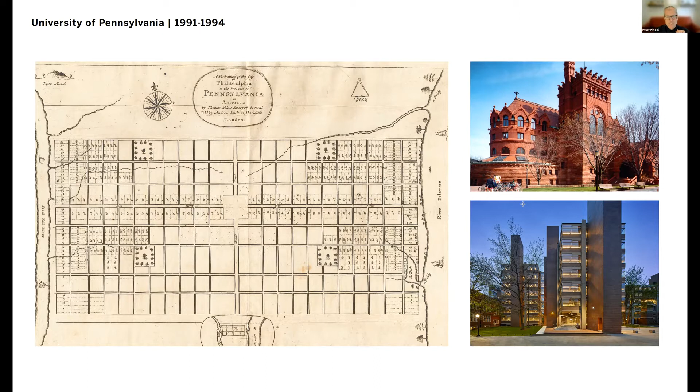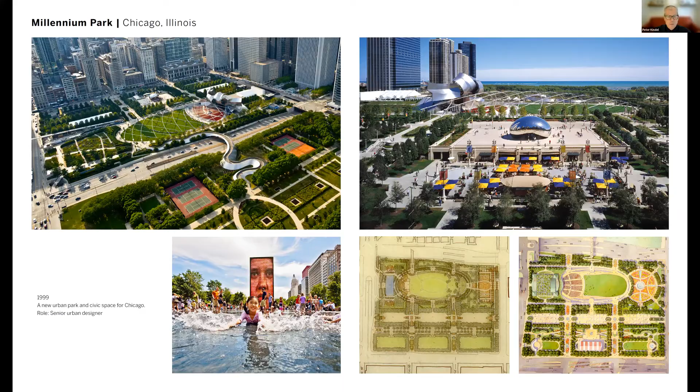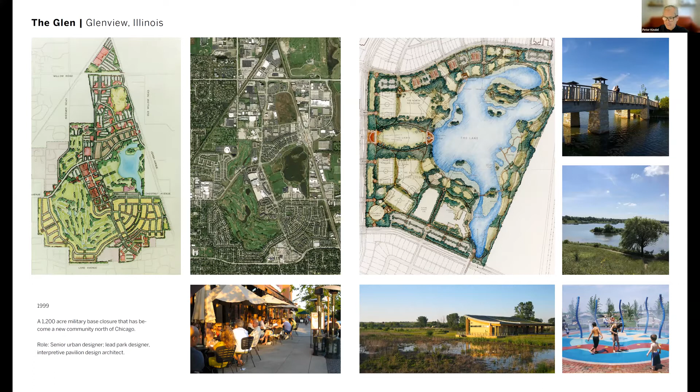I thought I would focus for the first half of the discussion on my work in Hong Kong. This was a very transformative time for me. My wife and I moved to Hong Kong in 2014. We were there for 4 years, and we essentially built the Hong Kong studio for SOM from scratch. When I got there, there was just one other person, and by the time I left, there were 16 people that made up the studio. It was a very successful run.

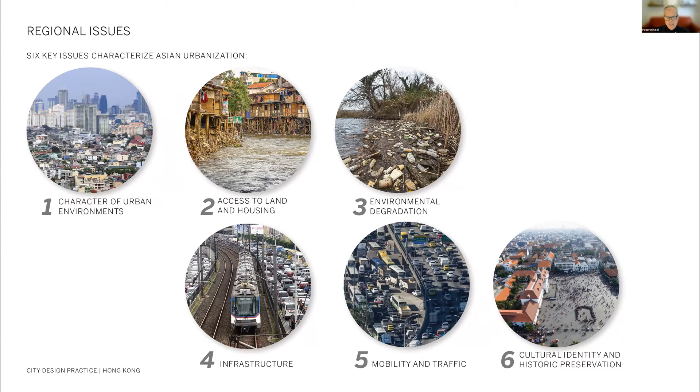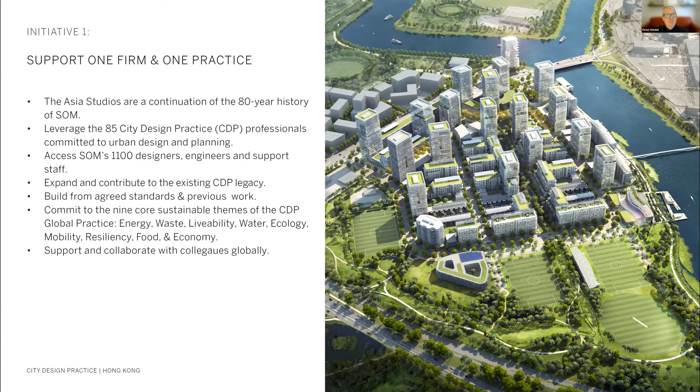So I thought I'd just show you a few projects. We organized our studio around a few different initiatives. One was really to extend the practice and support SOM. A second one is, again, to commit to cities to keep that mission alive in our work in Asia.

One of the big components I advocated for was environmental restoration. Environmental degradation in Asia is a big issue, so we tried to make all of our projects support the idea of restoration.

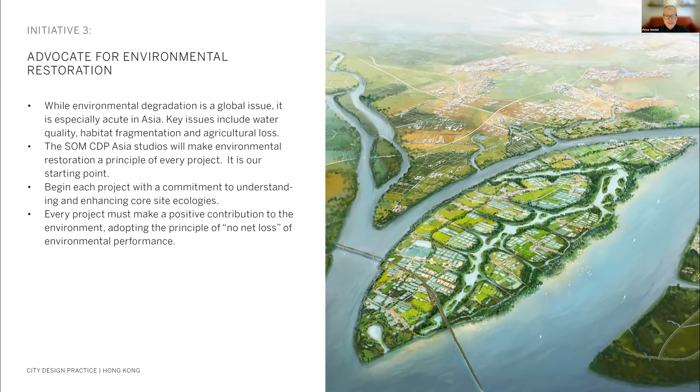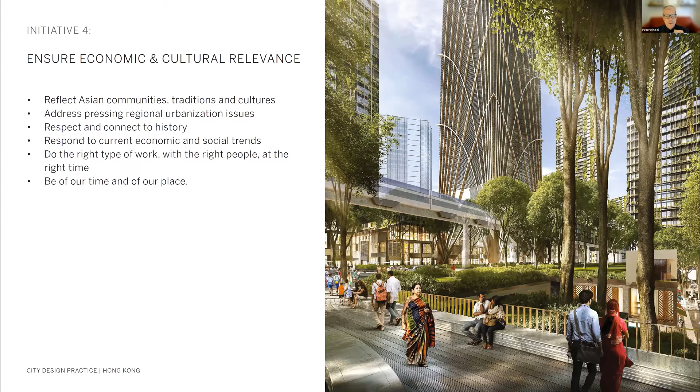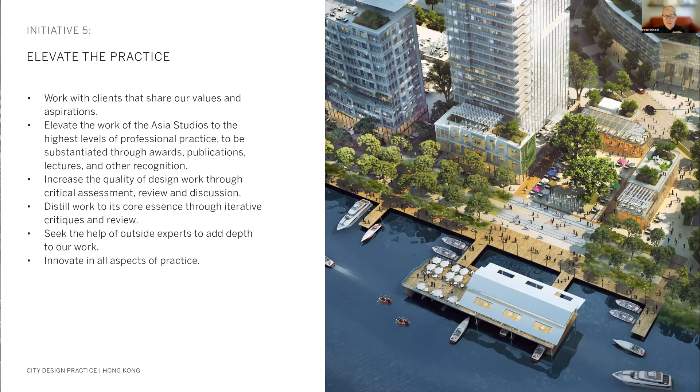And then the economic and cultural relevance of our work is very important. Asia has many different countries, many different cultures. I think in the Association of Southeast Asian Nations there are 10 individual countries, each with their own culture and traditions, so we really tried to understand that. And then, of course, elevate the level of work in Southeast Asia and Asia in general, bringing a level of excellence and craft to urbanism.

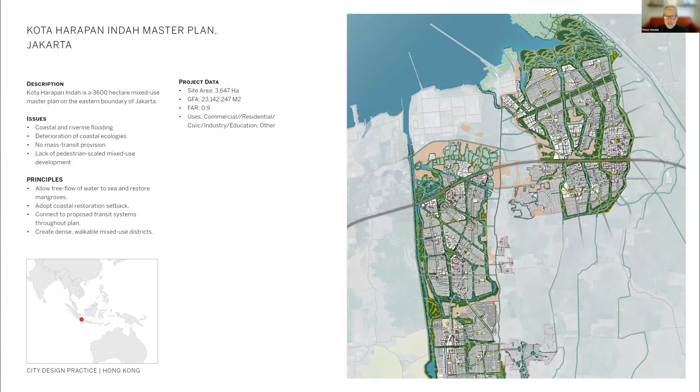One of the cities we worked a lot in was Jakarta. The very first project we worked on was on the eastern side of Jakarta for a client we had been pursuing for quite a while. They had very significant land holdings, which you can see on the right. However, it was right on the sea edge, and so what we did was work with the existing hydrological systems to structure the plan around these drainage corridors, which you can see in this image.

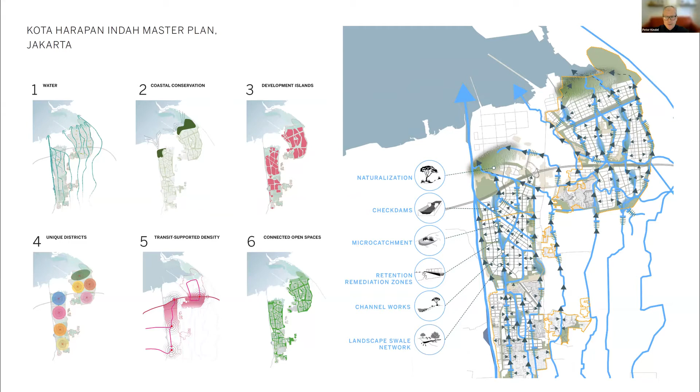We worked oftentimes with consulting landscape architects. In this case, it was a firm out of Toronto, but you can see the water system on this site was very complex on the right-hand side. So the project really became about accommodating sea level rise and these floodwaters, but also trying to create good urbanism, good roads, good public space, which you can see here.

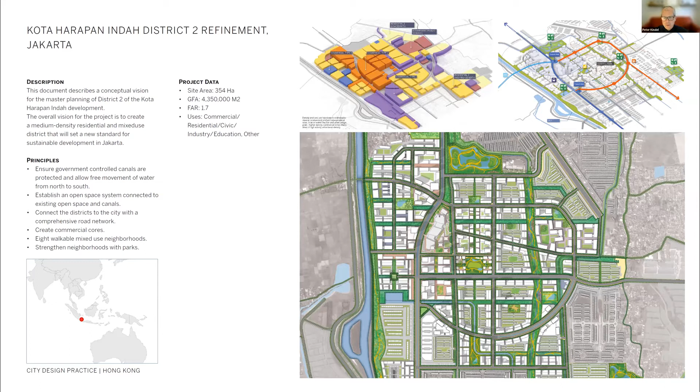And then we had the opportunity to work on a detailed plan. This is the phase 1 portion of the project, so we were able to take some of these ideas further in this part of the project. You can see some of the drawings across the bottom. We were relying heavily on landscape concepts to manage the open space and stormwater concepts.

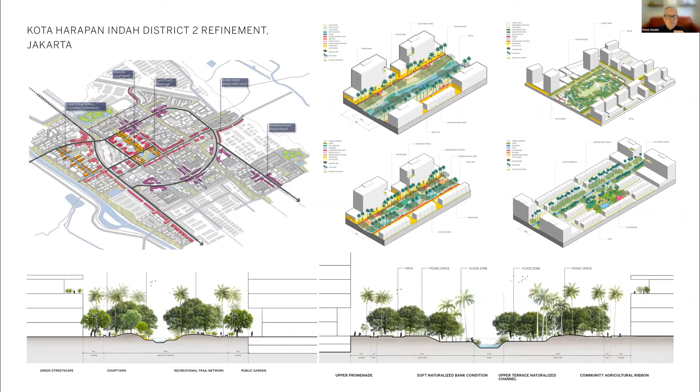I think what's exciting about urban design, at least for me, is the integration of architecture with public space and landscape. That's really the area I am most interested in. How do these systems work together to build communities?

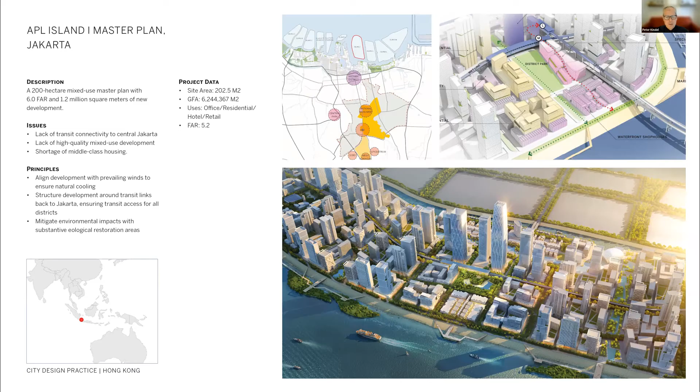Another project in Jakarta was this one off the coast. One of the issues in these countries is because the land ownership structure is less clear than, say, in the United States or Western nations, oftentimes the strategy is to build in the water, in these shallow areas off the coast. So development rights are awarded to developers and they dredge and build islands. This was one of those projects.

So we worked with this owner to create a development concept for this island, again promoting concepts of good urbanism. You can see here the building forms, both low rise and high rise. We connected this into the Jakarta subway system, so you could actually take the subway back into the main part of the city. One of the things we always try to do is have a mass transportation or public transit component to our work.

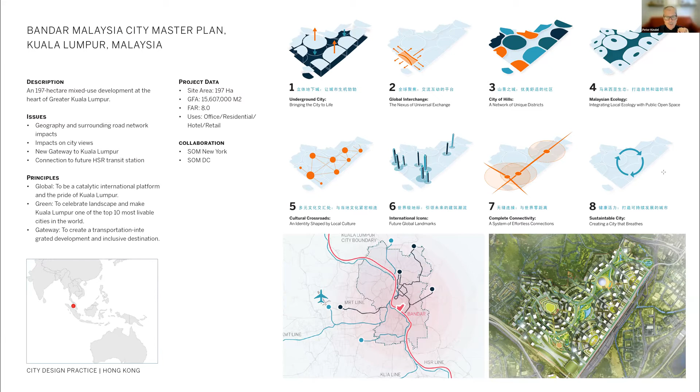This project was in Kuala Lumpur, Malaysia. This was also a really interesting project. It was an old airfield that was being decommissioned and redeveloped. You can see our diagrams in the upper right. We often try and clarify the design principles through these diagrams. This is the overall development plan.

What was interesting about the site is they carved the airfield out of the hills, so part of the site was hilly and part was flat. The concept was to use the density the developer was asking for to rebuild the hills that used to be there. We designed this central open space as the primary park. This one also had a regional rail link and subway connections that connected down to Singapore, and it was also a high-speed rail station.

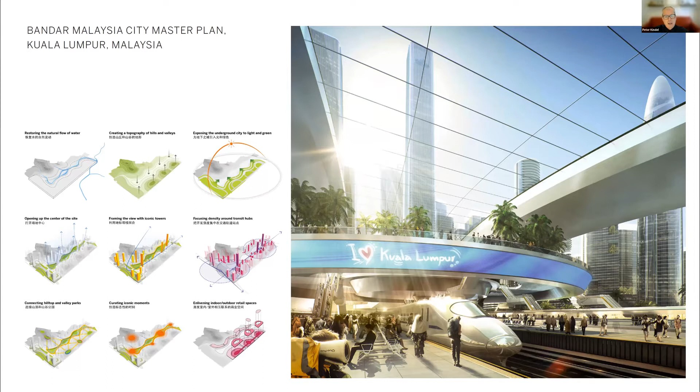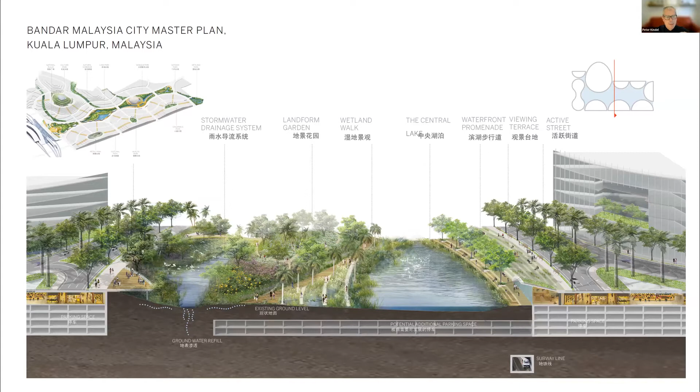Here you see a view of that central park. Again, a very dense project, but you can see how those building forms begin to recreate the hills, and the central park actually functioned as the valley for the project, so it accepted the stormwater. In this image, you can see how we tried to design the structured parking below grade, and in the upper left, how the Central Park organized the project as a primary public space.

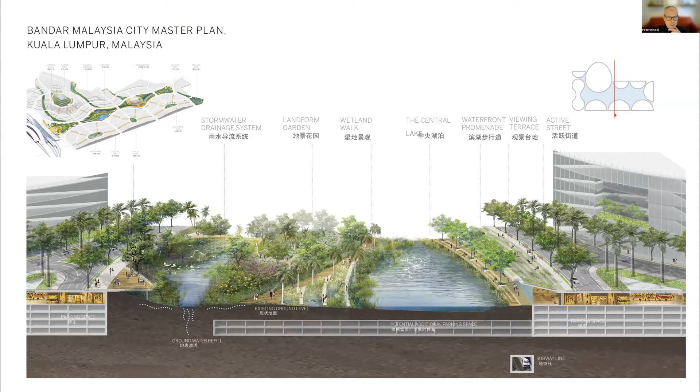This was a competition that we won, so the project is moving forward. But like so many places and projects in Asia, a lot of times it'll change substantially from the original competition submission. Here's a view of that Central Park area.

Another project that we worked on, also a reclamation project, is this one in Manila. Like many of these cities, Manila has a lot of population growth, again demand for development land. This was a shallow area off the coast of Manila, just south of the city.

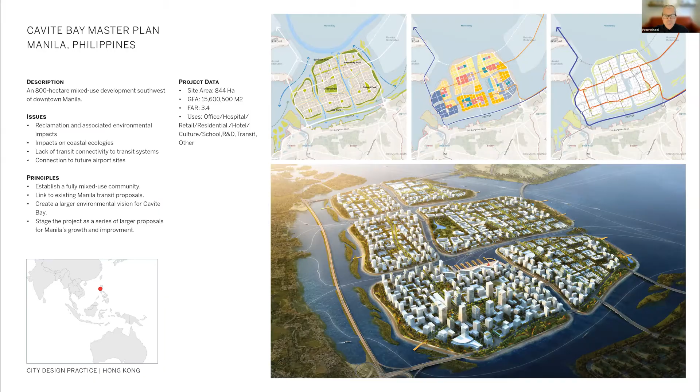As a practice, we have really tried to not do much reclamation anymore. Reclamation creates tremendous impacts on the seabed. So we have begun to move away from reclamation projects, but at this time we were still doing them.

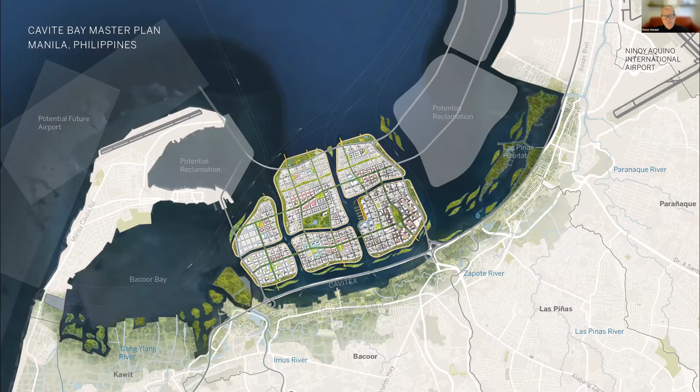But what we tried to do was create some offsetting benefits. You can see to the left and right of this, we proposed restoration of ecological areas that have been lost. So it was a way of balancing the impacts of reclamation with restoration of these ecological habitats. We always tried to take a bigger view of how the project began to connect back to the city, and in that light, we leveraged this project to create these 10 projects for Manila. The diagrams on the right illustrate how reclamation could be done in a more sensitive manner, but still respecting the riverways and estuaries so important to the city.

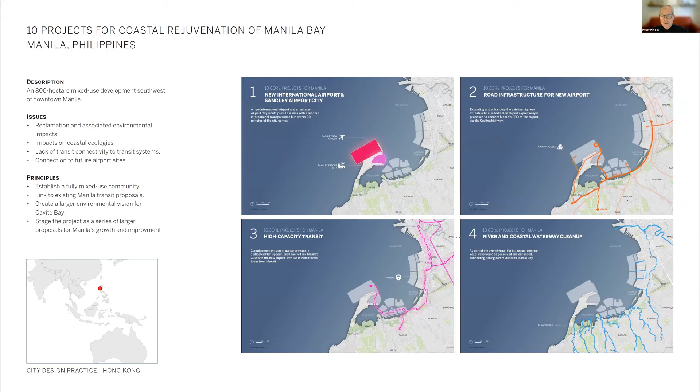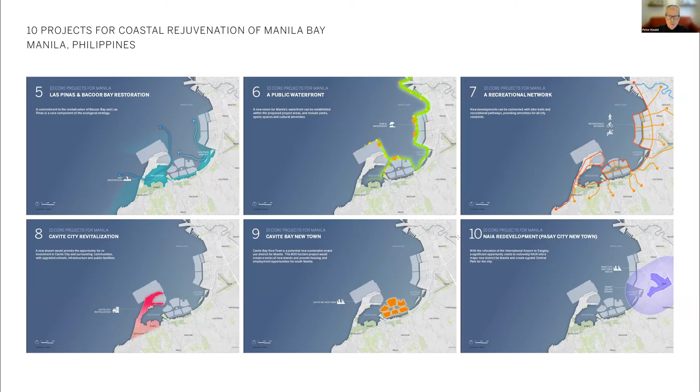And again, we always look at things holistically, not only from a development standpoint, but from an ecological standpoint and a transportation standpoint. So these were always good ways to understand the impacts of the projects overall.

Another important project that I worked on was this one, Cook Cove, in Sydney, Australia. This was the first time I had been to Australia and worked in Australia. This was an existing golf course right next to the airport that was being considered for redevelopment. What was interesting, it was at the mouth of this river, and this site also would flood occasionally.

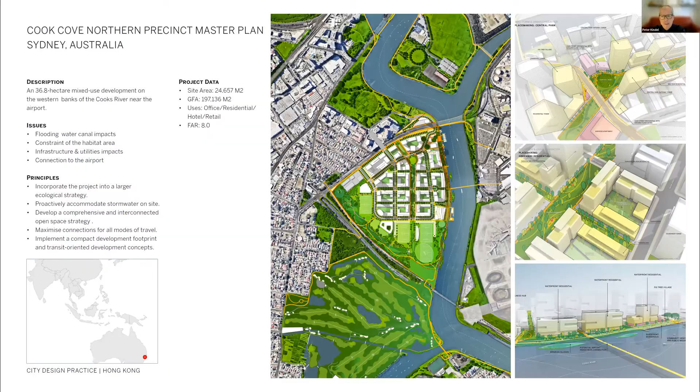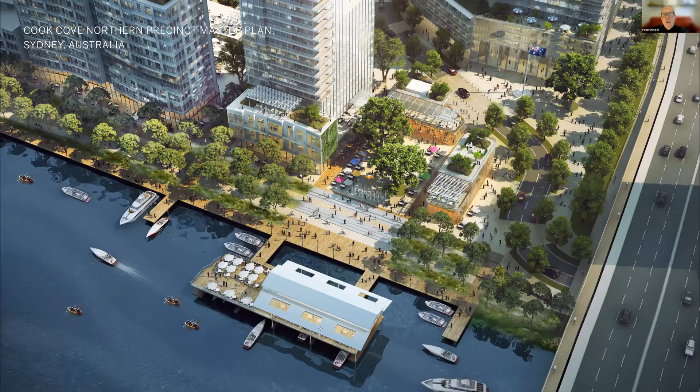The project was designed to accommodate flooding. You can see this green channel down the middle of the project—that's actually a floodway. So when this river starts to rise, we designed it in a manner that water could cross over this road and go through the project. The whole southern part of the project, where these recreation fields are, was designed to flood, to accommodate this stormwater. That's something we spend a lot of time on, thinking about how changes in sea level or flood control issues can be handled on these sensitive sites.

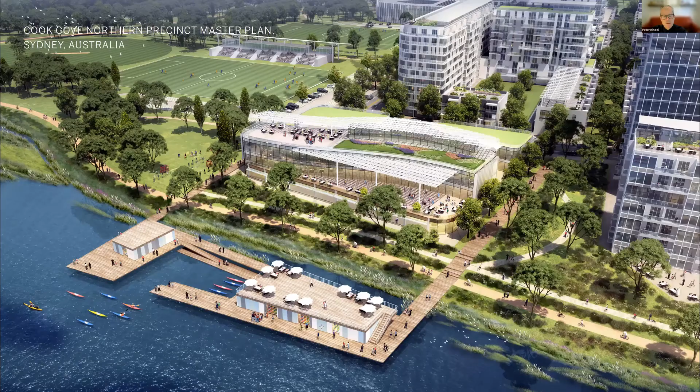We spent a lot of time on the water edge and some of the urban spaces to really create an active community. This was a mixed use community, with office and residential. We always try and advocate for a mix of uses because it reduces car travel, and then we fold in the ecology component.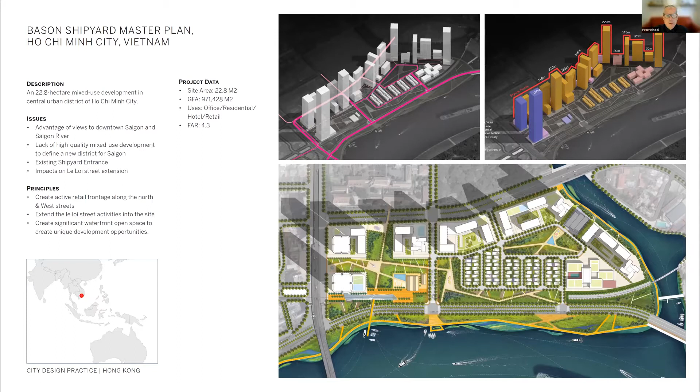We also worked in Vietnam. Here's a few projects—I'll go a little bit quickly through these. This is Ho Chi Minh City, formerly Saigon. Like all of these cities undergoing continued growth, this was actually a shipyard being considered for redevelopment. We see a lot of that in Asia, just like in the United States, these industrial sites being turned over to development. Another one, just up the river from that one, is this Thu Duc site.

This was a really fun project as well, again right on the river, an old industrial site. What was really great about it is it had an MRT station, or subway station, right in the center of the project. So we based the whole project around that transportation link and the river character. You can see the blue line through the middle of the plan was a canal that we introduced into the project to emphasize that riverfront and water connection.

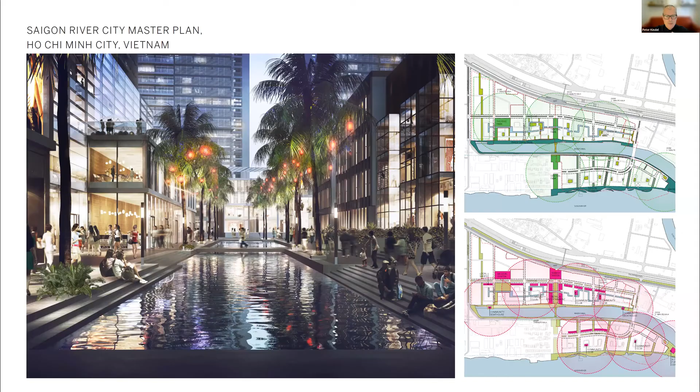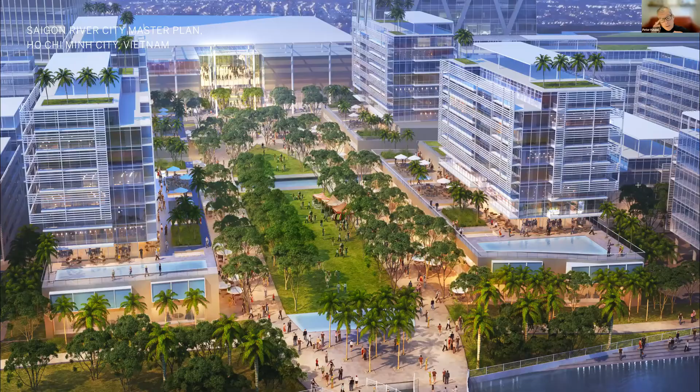We always try to give projects an identity that's drawn from the place and context. This was again a mixed-use project with both low-rise and high-rise buildings - lower rise towards the river edge and higher rise towards the highway and MRT subway line. We spend a lot of time on massing configuration as urban designers, and then often hand off to our architecture colleagues at SOM to advance them. Sometimes in highly collaborative environments, we work directly with the architects on specific buildings in our master plan so we can tailor the architecture to meet the master plan goals.

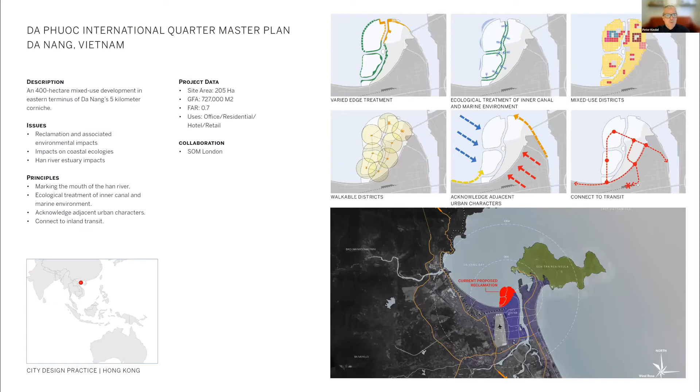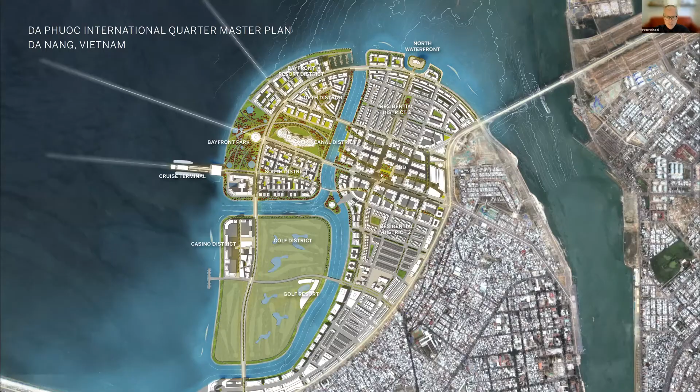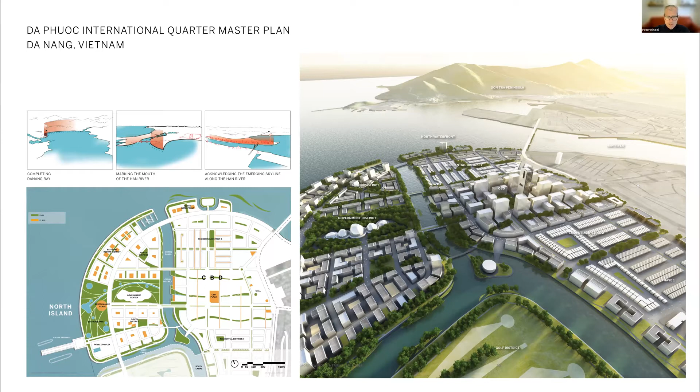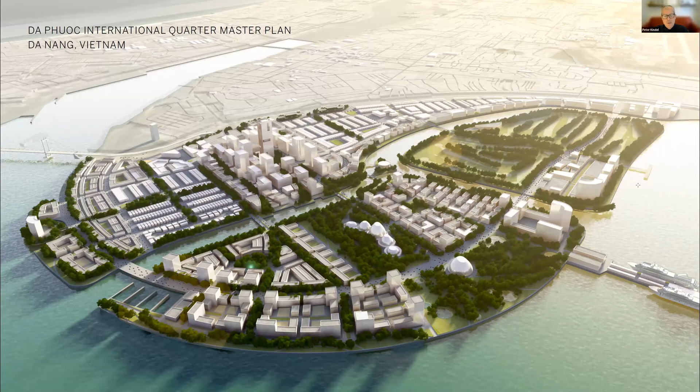We also worked in Da Nang. This was an extension of the downtown core. This project had actually been reclaimed, but they had not yet developed the land. So we were working with previously reclaimed land, but crafting a new plan for it. One of the things we always try to do is integrate new development with the existing cities we're working in - connecting to existing roadways, linking to existing open space connections, and creating a plan that's respectful of its location, making it feel like an extension of the city, not a separate project.

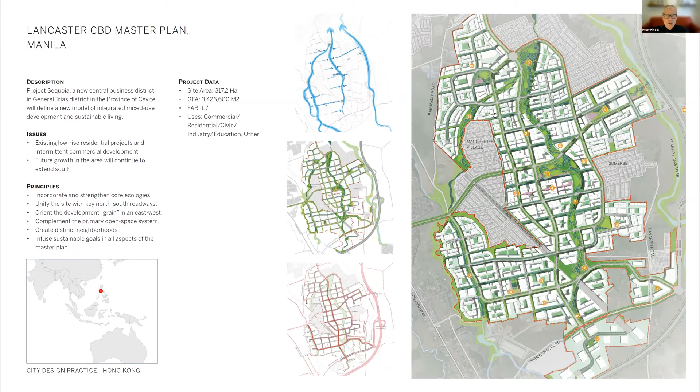Another issue in Asia is the intermittent development patterns you see. In the drawing on the right, the gray areas were neighborhoods that had already been developed, so the client asked us to propose a development strategy for the remaining land between these developments. The site boundary was extremely convoluted, but there was a river running through the middle of the area. So we structured the plan around that river - here you can see a view of the project and how we began to do that. This river ran from the upper left to the lower right, and that became the central organizing element for the whole project.

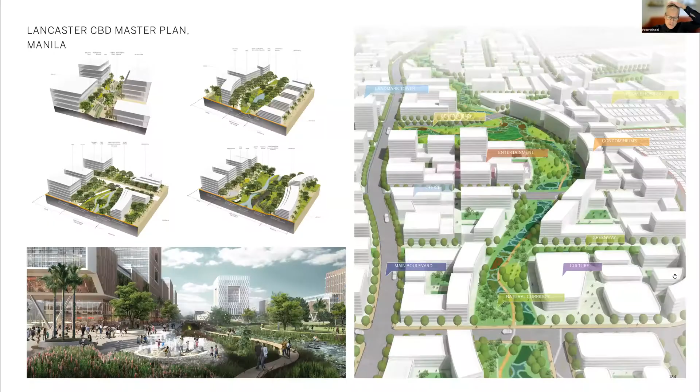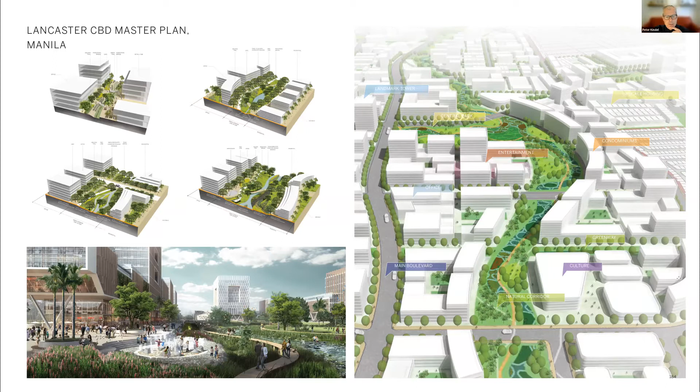I often draw on my landscape background to read these site indicators about how the land wants to be developed or could be developed, and then try to leverage those as assets rather than constraints. So you'll probably see in many of these projects this common thread of landscape architecture running through the urban design work.

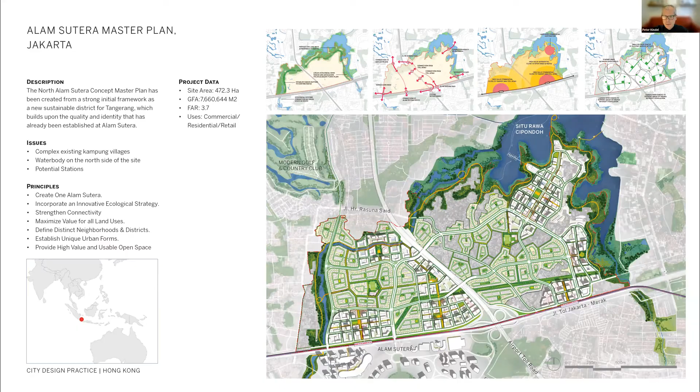Back in Jakarta, we had a similar issue with existing villages on the site. You can see in the lower right drawing there was tremendous complexity in the development boundary. These villages - oftentimes people have been living here for many years and don't want to move, or are reluctant to. So we tried to weave this new development in with those existing villages in a way that in 20 or 30 years it would just be part of a larger urban idea. There were some areas where we were able to develop more densely, shown in the taller buildings, but most of the project was actually low density.

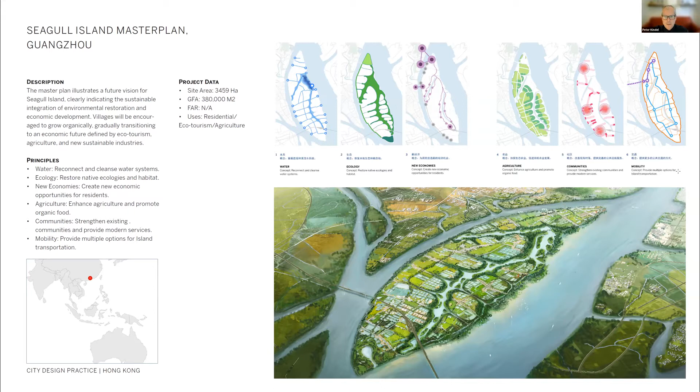The last project I wanted to share from my Hong Kong days is this Seagull Island master plan in China. This was a really unique project - it's in the Pearl River Delta, one of the major delta systems in China, one of the big three or four deltas just north of Hong Kong. What was really fascinating about this project is it was an island in the middle of the Pearl River, what they call the Lion River in China. The planning authorities from the city of Guangzhou wanted to redevelop the island as a destination for citizens of the city. It had extensive farming, and they wanted to make it into more of a tourist-based destination.

So we advocated really for three things. One is to preserve the existing villages and agriculture as a key part of the concept. The second is to restore the wetlands that used to exist between these islands, which you can kind of see on the drawing on the left. And third was to introduce this tourism component.

Because it's in a high risk flood area, there is a levee around the entire island. So we worked extensively with my team, on which there were a few landscape architects in addition to me, to soften these levees, which you see in the lower drawings, to reinstitute and reincorporate mangroves, which protect against flooding, while still leaving the levee to protect the land, but softening it.

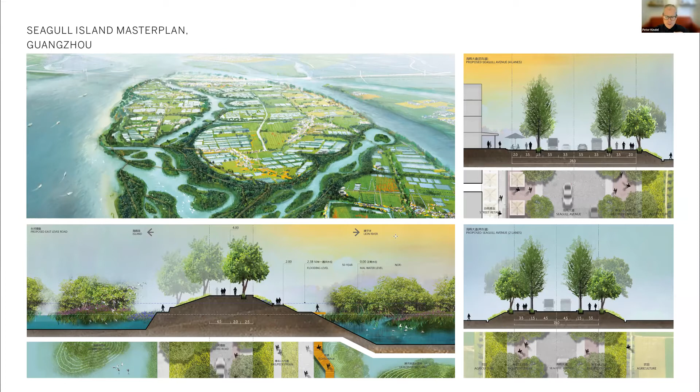And then we did these fun renderings. We were trying to look at new ways to express these ideas. So we came up with this new way of doing our renderings, which was a little more fun and a little more accessible for non-designers.

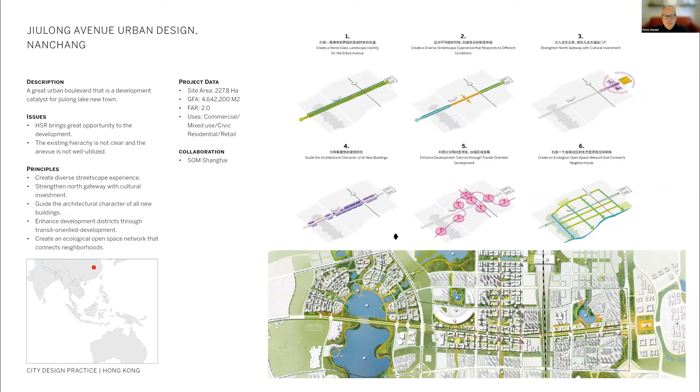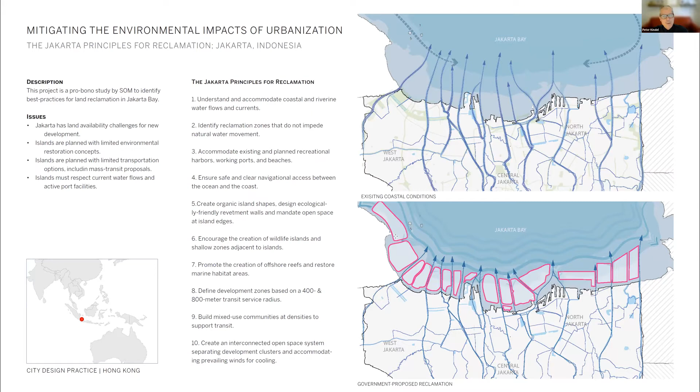I'll skip this project. We oftentimes do research along with the work that we're doing. As I mentioned in the Manila case, we did a larger strategy for Manila. We did the same thing actually for Jakarta, which we ended up calling the Jakarta Principles, because the projects we were working on were not unique. Different developers were doing similar projects all across Jakarta. So we said, why don't we just take a couple of weeks and write down the best practice principles that we thought were important.

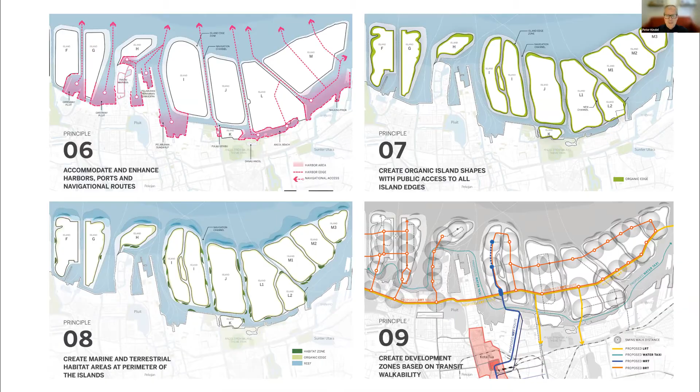Another great project that we took on as a research project was what we called the Hong Kong Waterline. Oftentimes I'd have the studio do these projects during the Christmas holidays, because a lot of times our work would get a little quieter. So we would just take the two weeks around Christmas and New Year's to do a two-week research piece.

This idea was generated by the fact that Hong Kong's coastline is actually not that accessible. There's a lot of trails in the middle of Hong Kong Island, but the coastline is tough to get to in many places. So we said, what if there was a water trail all the way around the perimeter of Hong Kong? In a lot of places this trail exists, but it's not continuous—it doesn't go all the way around the island. So that was really the concept, to connect up some of the pieces.

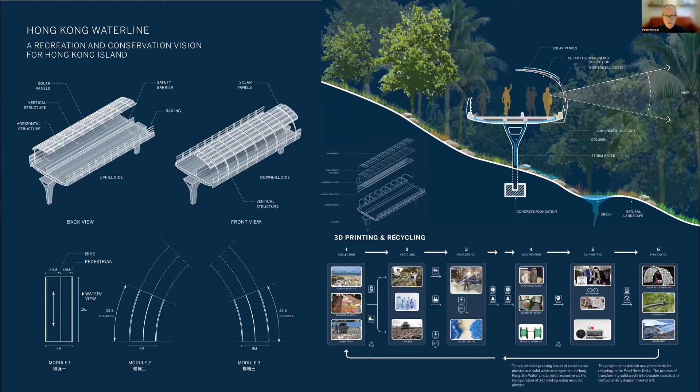You could insert these into the more natural landscape, so they wouldn't impact the natural lands. They would be above it, and it would also just be simpler to move through the landscape. But you're not fully removed from the landscape, you're just outside of it. So this is a rendering of what that might look like—again, you're a little bit up in the trees, and there would be a bikeway and a pedestrian trail. So that was a really fun project.

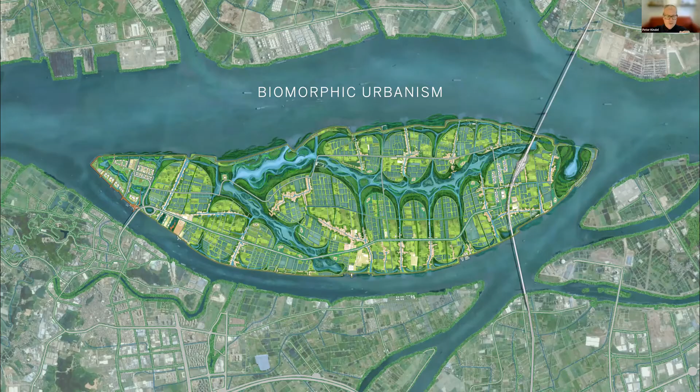So it started with this idea of biophilia, which many of you may know, based on the concept that everyone has an inherent attraction to the natural world.

I think most of you have heard of this idea of biophilic design, which is introducing nature into design, whether it's interior plants or buildings that have plants on them, but bringing nature into closer contact with people. There's also another idea out there called biomimicry, which states that our buildings should mimic nature. In other words, can nature teach us how to build better buildings or better places?

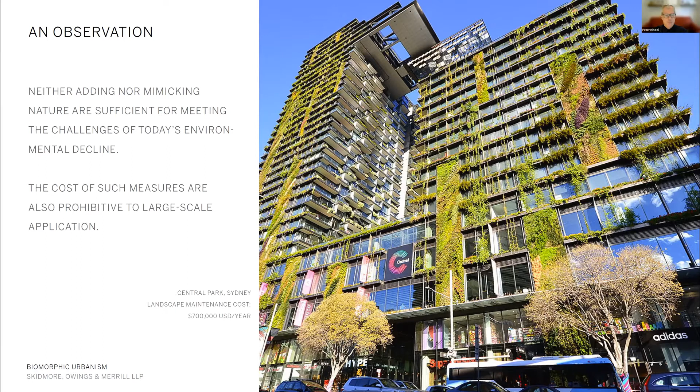The problem is that this often results in projects like this, where we're putting plants on buildings and it's very expensive. My concern is that it doesn't really have a beneficial impact on the ecosystems in which these buildings exist. It does serve a purpose, but it doesn't have that beneficial quality.

So I began to think more about how we could integrate ecology into our urbanism, and the fact that every city has a unique DNA, defined by its ecology and its culture. Every city is different. So I developed this idea of biomorphic urbanism, which states that ecological systems should be a foundational input into how we think about cities.

So this is hydrology, habitat, topography, climate, but we also need to incorporate cultural identity and social systems into our work. These two concepts are really fundamental to how biomorphic urbanism is initiated, the foundation of that concept.

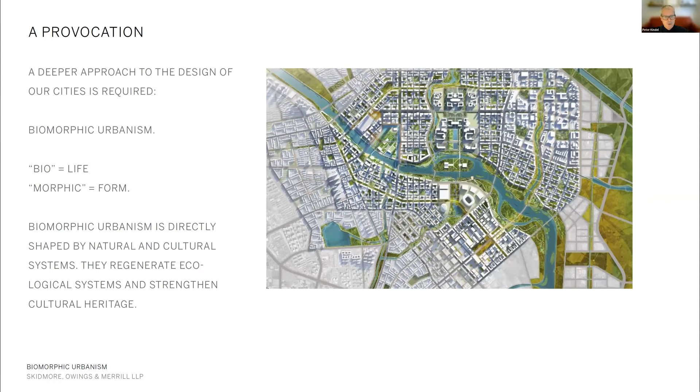So the idea really states that taking these two inputs, we can begin to develop a unique response to every urban design problem we address, incorporating social inputs and ecological inputs.

So how are they different? Biomimicry is more the emulation or mimicry of nature. Biophilic design is about introducing nature into projects, or adding it. Biomorphic urbanism is really having our cities shaped by ecology and culture.

So it's restorative in its purpose. A few corollaries to the idea: one is that these two are distinct and should be considered and discussed for their independent attributes. Each of them has a different purpose and value, a distinct purpose but also a distinct value, and those should be honored and understood.

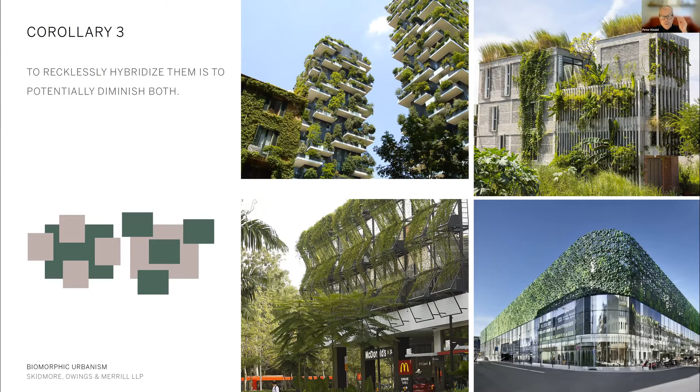But to hybridize them begins to diminish the impact of both of them, potentially. Not always, but sometimes. So what we want to avoid is this idea of greenwashing, where we simply add nature randomly into our environments without that restorative benefit of the ecosystem.

Corollary 4 is that our engineered systems have become too dominant in how we plan cities. This is a picture of the LA River, which has been channelized and basically stripped of its ecological character.

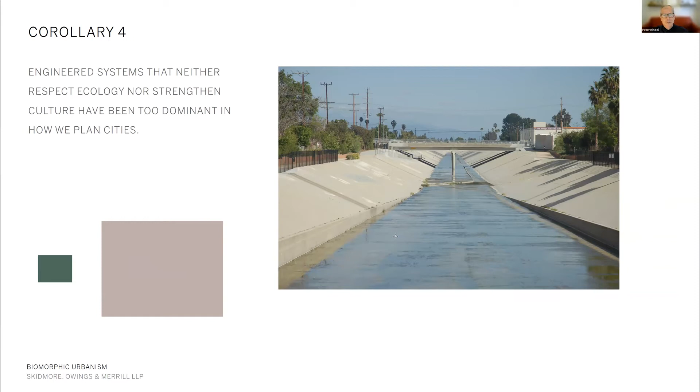These two ideas can be complementary, that they can support each other. They're not mutually exclusive. We can bring them together, as we did at Millennium Park, and both can be understood and optimized for their highest performance and highest value.

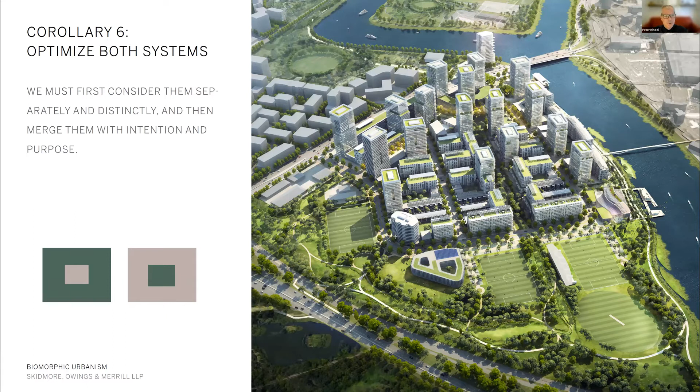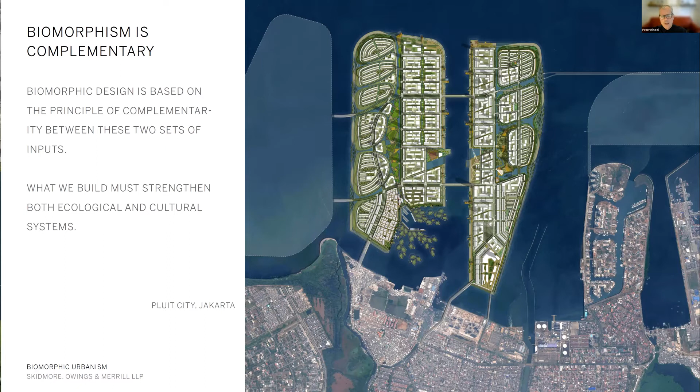It's also specific. Biomorphic urbanism can be very specific and distinct to its place. So a project in Florida should look and feel differently than a project in Michigan, for instance.

Our design work should be granular, meaning it's scaled for people, not for cars. Biomorphic urbanism is additive, so every project we do should add to the quality of our cities, add to the quality of a project or place, that we're not working in isolation.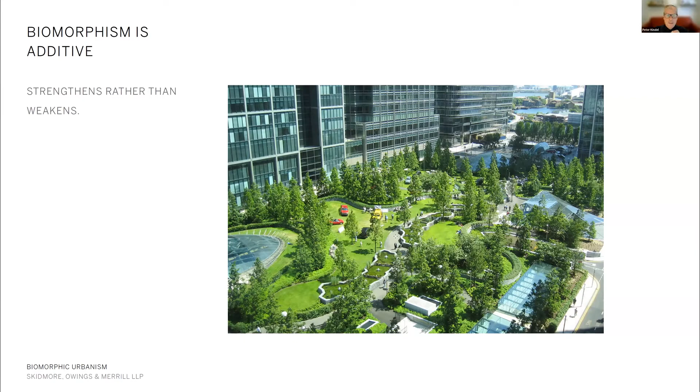And it's connective, it joins things together rather than separates things. So what we may have previously considered a barrier or a separation in a city, we can now begin to understand as a connective element, such as the Chicago River.

And then finally, on the issue of transportation, which is an important component, but I feel that transportation systems have been too dominant in how we talk about cities, especially in our suburbs. These systems should support our goals for urbanization and ecosystems—they're really not the drivers of good urbanism.

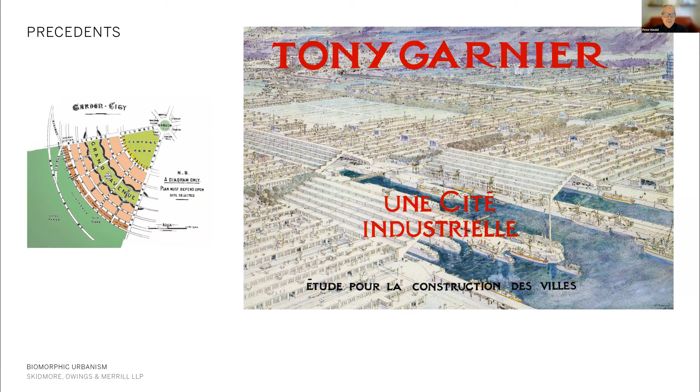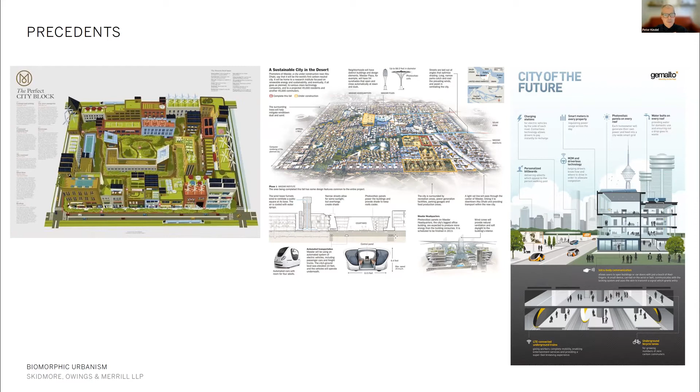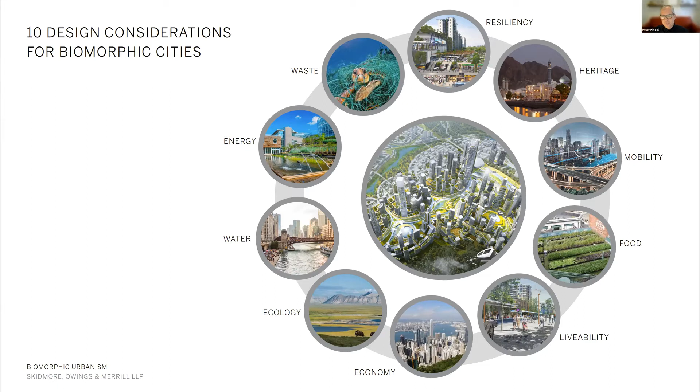So I got my team from Hong Kong together and we started looking at precedents on future cities. What we didn't want to do was have something that would be outdated in 5 years. We wanted to avoid all the cliches of future cities with flying cars and things like that. So we really looked at some of the work that had been done previously. We did decide to bring forward the 10 principles from the city design practice as the structure or framework for our future city. And what we quickly realized, because she only gave us about 3 months to do this project, is we couldn't design a future city from scratch. It was just too much work. So what we decided to do was use projects from our portfolio, or from around the firm, to organize this 12-page submission, this 12-page article.

So this was the cover of the issue, April of 2019. We had a small part in this. There was a number of other articles, as National Geographic always does.

I'll just show you the spreads, what we ended up with. This was the first 2 pages. We had a big yellow city of the future opening page. And then on the next page, on the right, there was a brief overview of how we did it. You can see our 10 principles here in bold. We organized it around 5 scales, from the region to an actual interior building, and I'll show you those. That was very important to me and the team, to talk about scale and show how a city would work at multiple scales. So the first thing we did was we drew the regional scale.

And we actually used a real place. This is a part of the coastline of Asia, but there's no city there today. We created all of this.

But what this allowed us to do is talk about how a city and its immediate regional context are so importantly intertwined. So we talked about agriculture, and regional transportation connections shown in the orange lines. The agriculture is shown in the yellow color. We also wanted a coastal city because approximately 75 or 80% of the world's cities are within about 60 miles of a coastline. So even though there may be, and probably will be, significant sea level rise in the future, we still have cities on the coastline that we have to think about.

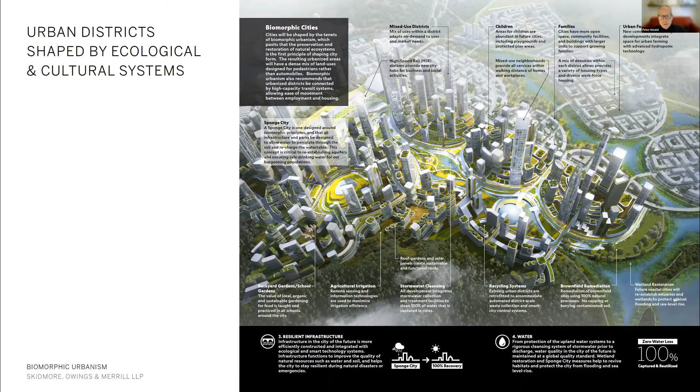Again, a series of ideas at this scale. And then we also utilized this graphic. This is a cross section through that same urban district. We wanted to talk about building height and density and how things would work relative to open space. So we introduced the coastal edge on the left-hand side. You can see a park in the middle of the project, and on the far right, that high-speed rail station that I mentioned earlier, and then introduced some of the underground components that a city might want to utilize.

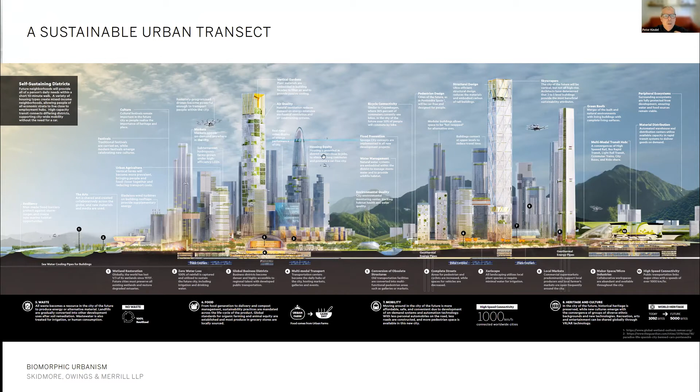And then here you can see the principles across the bottom: waste, food, mobility, and heritage and culture. This was actually a fold out in the National Geographic, 4 pages. So this was our big centerpiece.

And then finally, we focused on the last 2 scales, which were the building scale on the left and the apartment scale or dwelling unit scale on the right. The building on the left was actually a SOM skyscraper that had been designed for a competition. We did not win. So we repurposed that and talked about the ideas. There was a lot of really innovative ideas in that submission. So we talked to the team about using it, and they agreed.

And then the drawing on the right was prepared by our London office, which was a separate research piece they were doing on the future of residential buildings. So again, in this scale, we talked about energy and livability. We were able to align those 10 principles with a scale and talk about the issues that were most relevant to both that scale and the principles. So all in all, it was a really exciting and successful project. We met the deadline and had it published, and the rest is history.

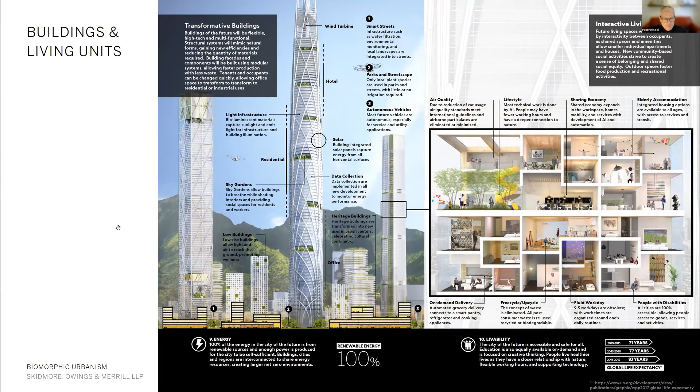I just wanted to close finally on a project that I'm working on right now. I'm now based in Hong Kong, or in San Francisco, as Paul mentioned earlier, and bringing some of these ideas to the western part of the United States. And we were fortunate enough to win this project last year in Salt Lake City called The Point. This site is today a prison, a state prison site, and they're relocating the prison.

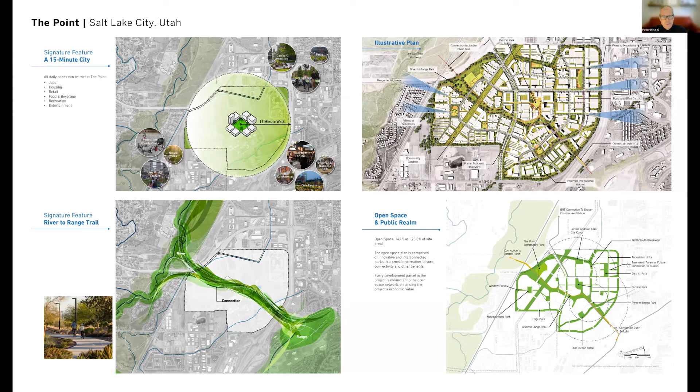It's actually a relatively low-rise project. The tallest building in the master plan is about 12 stories, which we were okay with.

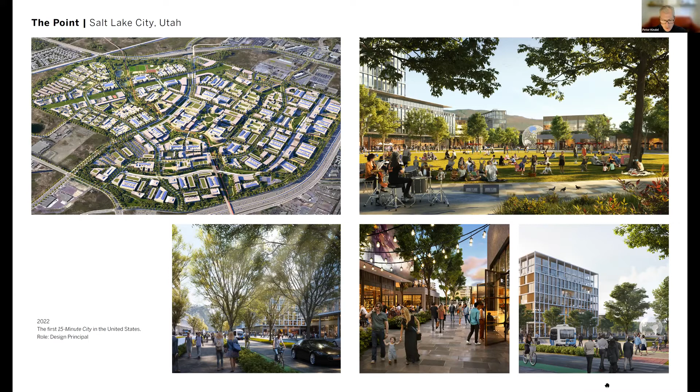So Paul, I think I will leave it there. That's probably plenty to talk about. And happy to take any questions if you'd like.

Well, we have 5 questions in the Q&A, and I actually sent one through the chat. Perhaps we'll start with my comment, and I'd like to ask you if you could expound a little bit on the term you used called greenwashing, and how that relates to concepts of green design, and then how it achieves anything close to regenerative design in buildings and in landscape systems.

Well, I think if you open any design magazine or design website today, you see many projects with lots of buildings with lots of plants on them. And I would simply ask the question, is it restorative? What's the benefit versus the cost? I don't have an issue with plants on buildings or bringing nature into buildings, onto balconies or rooftops. That's all great and has a number of benefits. Green roofs are wonderful ways to mitigate heat island effect and to manage stormwater on rooftops.

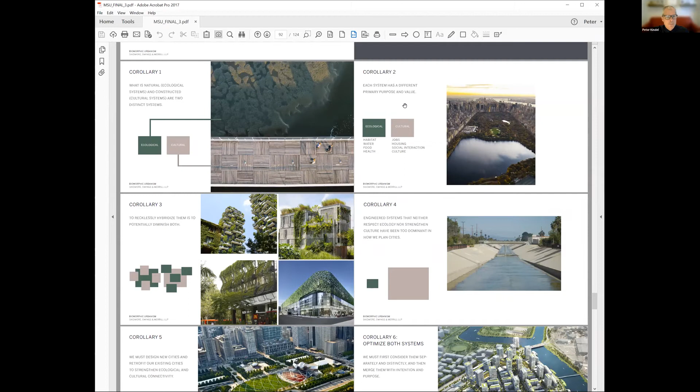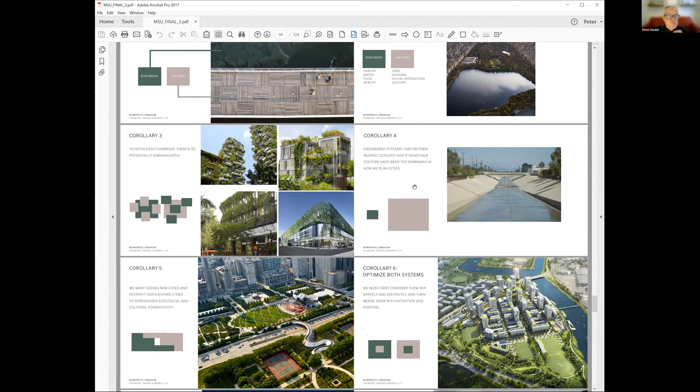So here are the corollaries. The natural and ecological, natural and cultural systems are distinct—that's corollary number one. Corollary two is that each one has a distinct purpose and value. Corollary three is that to recklessly hybridize them is to potentially diminish both. Corollary four is that engineered systems that respect neither ecology nor culture have been too dominant in how we plan cities. Corollary five is that we must design new cities and retrofit existing cities to strengthen ecological and cultural connectivity. And corollary six is to optimize both systems—we consider them separately and distinctly, and then merge them with intention and purpose.

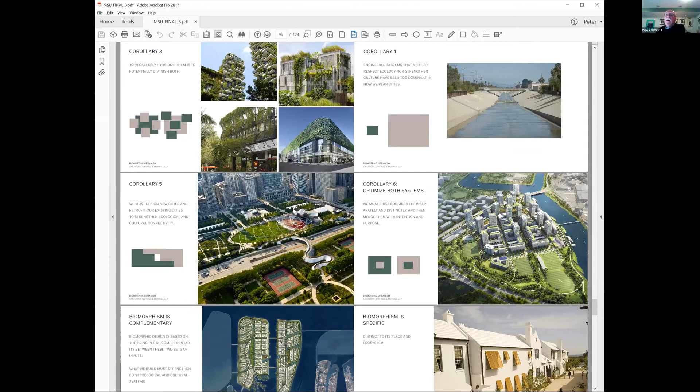Dorilus Vasquez Ramos has a second question, and comments that you show in the photos that the geography around Hong Kong is very striking. Are there concerns that the high-rises will ruin beautiful views?

That's a tough question. They keep building high rises there, so no one seems particularly concerned about it. I think the other remarkable thing about Hong Kong is about 75% of the new territories, which is where Hong Kong is located, is permanently protected open space. So even though it looks very dense and these buildings are very tall and close together, like they might impede views, when you're there it doesn't feel that way. It's very easy to get out of the urbanized areas to parts of the island where you don't even see any buildings whatsoever. So I'm not worried about that.

Dr. Kim, Junhyun Kim, would also like to comment on that question. For the Hong Kong? Yes. Unfortunately, I didn't get a chance to visit Hong Kong yet.